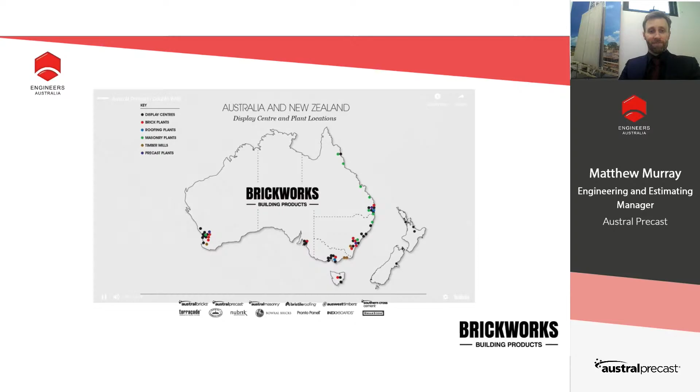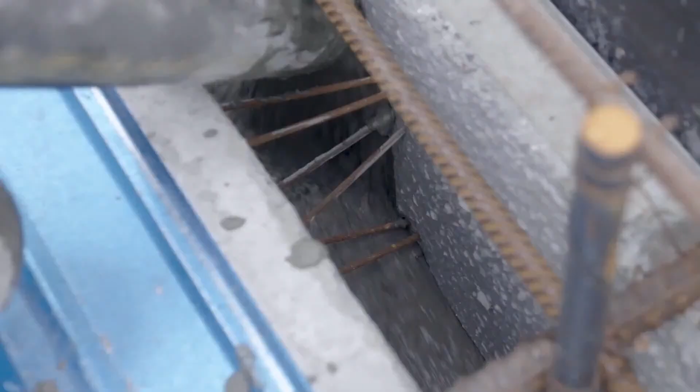Here's just a little snippet of double wall. Build with confidence with Austral Precast Double Wall, a permanent formwork system that brings quality, efficiency and flexibility to any construction project. Double wall uniquely combines the advantages of precast construction together with the engineering benefits of in situ construction. Fast and economical site processes, yet with flexibility for individual planning and architectural objectives. Double wall is the perfect solution for today's construction needs.

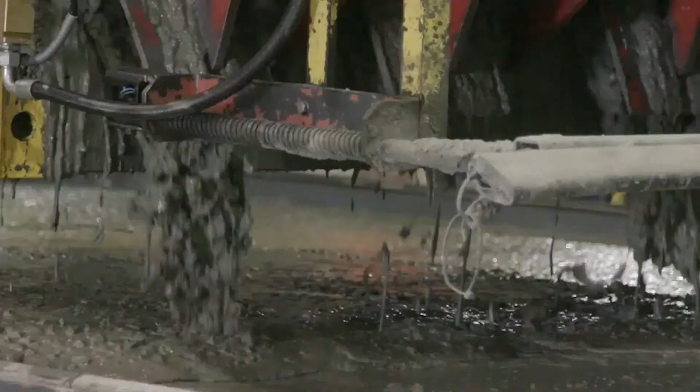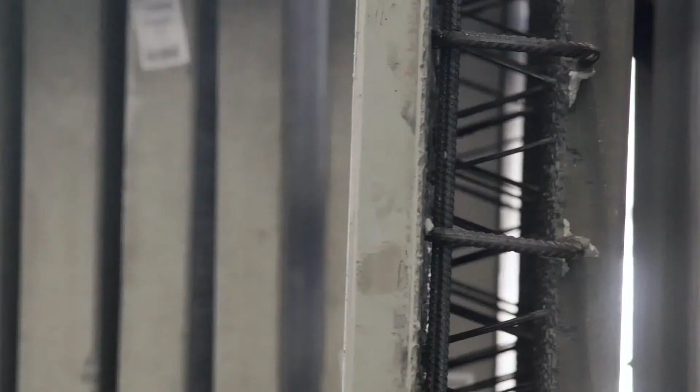Austral Precast Double Wall consists of a pair of precast reinforced concrete shells forming a cavity and connected by a lattice girder fabricated from reinforcement bar. Double wall is finished with joints and corners that minimize the need for on-site caulking, welding and formwork. Provisions for formwork with doorways and windows, electrical, cable, air conditioning and plumbing conduits are fully customizable. Overall wall thickness can vary between 170mm to 400mm, depending on each project's individual structure and applied load requirements.

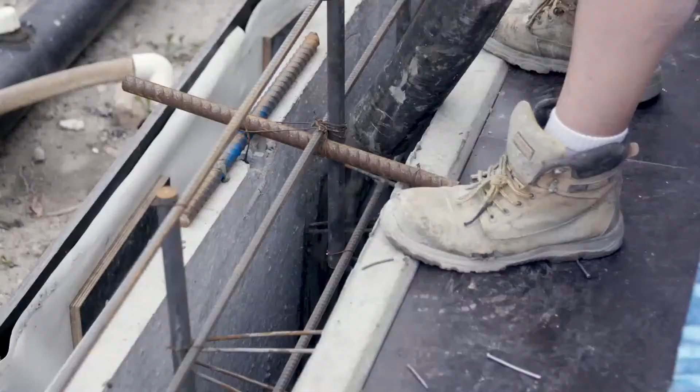On-site, double wall's hollow wall design structure allows for easier installation due to reduced weight crane loads. When cavities are filled with premixed concrete, double wall forms a strong and solid concrete structure. Unlike other permanent formwork systems, double wall has the added advantage of being installed with reinforcing for structural loads already incorporated into the product, eliminating 90% of the on-site steel fixing ordinarily required on-site. The results are ready-to-paint perfect facades where smooth surfaces are achieved on both inner and outer walls.

Austral Precast Double Wall is your ideal solution for stairs, lift shafts and basement walls, facades, cladding and retaining walls, functional partitions, noise, fire and sound barriers. And with the advantages of watertight construction and excellent thermal performance, build with confidence with Austral Precast Double Wall, the smart and efficient permanent formwork system.

Double wall is a permanent formwork system with all the quality and efficiency advantages of precast manufacture, together with the engineering benefits of in-situ construction.

So what is the major difference between double wall and a traditional in-situ structure? On the left-hand side here, we can see both plan and section views of a typical concrete wall with each face reinforcement shown in red and the starter bars in the slab in the darker colour.

On the right-hand side, we have a double wall. The major difference is that the double wall has a panel system, meaning there is discontinuity at the joint, and continuity of reinforcement is made by lapping steel at the joint in the core. Here the red bars represent the each-face reinforcement in each precast shell, with each precast shell connected by the lattice girder shown in green.

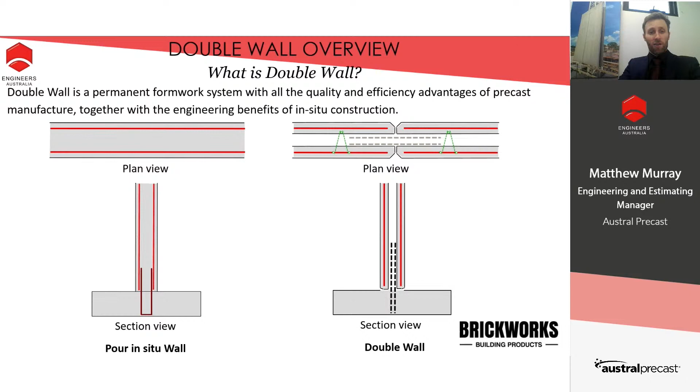The only structural difference from a double wall to an in-situ wall is that the starter bars and joint reinforcement have to be in the core of the panel to get continuity of the connections. On the left-hand side we see starter bars with essentially the same separation as the vertical bars, but in the double wall there will be a slight reduction in bar spacing due to the bars having to be in the cavity.

So double wall is a structural wall. The main thing for double wall is that the shell thickness is critical to the overall structure and the temporary works of the product. Shell thicknesses can be made from 55 to 70 millimeters, with 70 millimeters being the standard size of our formwork in our factory.

The core of double wall requires a minimum thickness of 70 millimeters, so that we can get the starter bars and any joint reinforcement into that core prior to concreting on site. The site concrete typically is a minimum of 40 MPa with 10 mil aggregate and 180 mil slump, using the 10 mil aggregate and higher slump so that we can make the concrete pumpable and get adequate core filling.

All the reinforcement that you would have in the in-situ wall is included in the precast shells of the double wall. The lattice girders connect the two shells together and serve two functions. The first is to connect the two shells together in the temporary state, so the embedment of the vertical bars of the lattice girder requires at least a minimum of 15 millimeters to connect the two shells. The second function is to make the wall act as a composite structure, and the reinforcement that crosses the interface from the lattice girder contributes significantly to this.

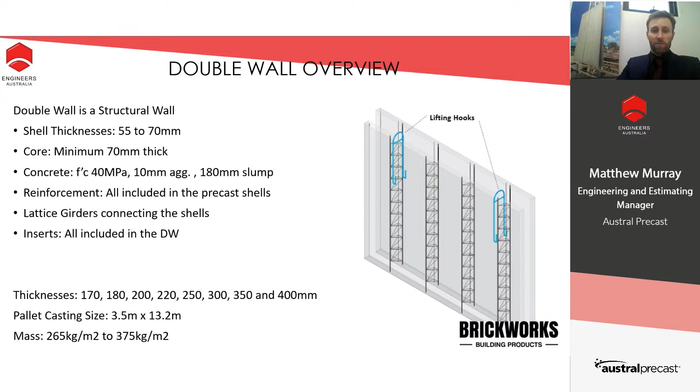So how do we actually manufacture double wall? The manufacturing is predominantly done in two stages of each concrete shell, with a flipping component in between. On day one, we make the first shell of the double wall, which has all the concrete, reinforcement, and girders in it. That is then cured overnight to reach a minimum of 20 MPa strength.

Once that has reached 20 MPa strength, the first shell is taken out of the curing chamber, put onto our pallet flipping mechanism, and inverted 180 degrees. Then the second shell is poured with the reinforcement in the second shell before the two shells are joined together.

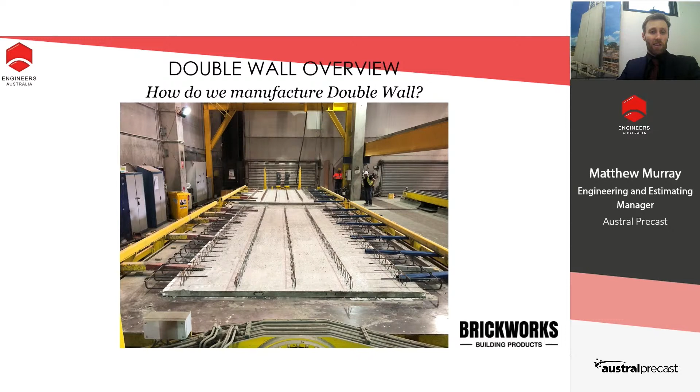For this particular product, we have some U-bar connections at the sides of the panel. The clamping you can see on the pallet, in red, yellow and blue, are essentially steel bars that clamp the pallet to the table. That's achieved through a hydraulic which cantilevers off the long yellow bars of the pallet flipping mechanism.

Once that's ready to flip, the pallet is raised above the station. The subsequent shell 2 is then poured, and that we can see here. Here we can see a 70 mm thick section that has all the concrete and reinforcement in shell 2 ready to go.

And then we flip this into the next pallet. Here we can see the flipping motion. This is a time lapse, slightly faster, but essentially what we're doing here is clamping the table above, inverting it 180 degrees, and then lowering it into the next pallet.

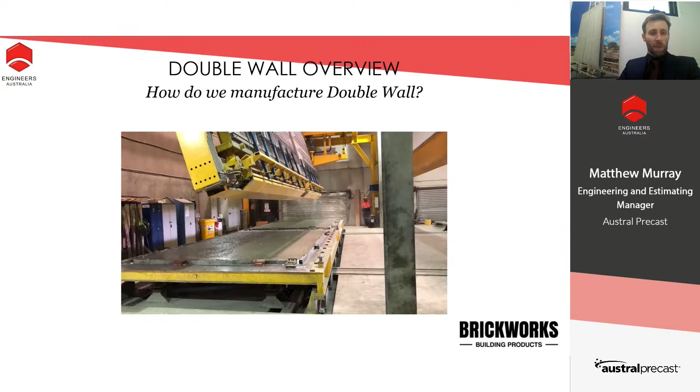Now there's a couple of key little things here. If we could pause the video - here we can see there's some tapered pins on the pallet. That's really critical in aligning the two pallets together, which we can see here on the left-hand side.

Essentially that does two operations - it separates the two pallets from one another and stops the pallet from crushing the panel below, and also centers that pallet to the pallet below. The panels themselves have some spacers in them, to help separate the two shells apart and to control the thickness. Once the pallet has been flipped, the pallet above is removed and the double wall is then put into the chamber, ready for its final curing stage before going to site.

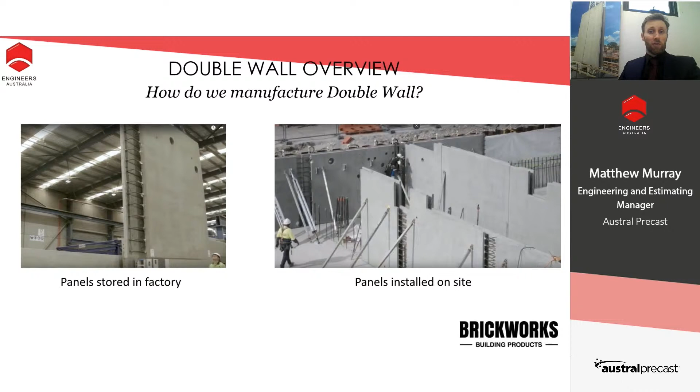So here we can see some of these panels that have been made in the factory. Typical construction manufacture methods has the double wall being made in the factory, lifted off the table using an overhead crane, and then put into storage. Once the site is ready for construction, the panels are delivered to site on an A-frame and stood and propped as you would with traditional precast using temporary bracing.

For construction on site, there's a couple of key processes. Firstly, the starter bar setout must be installed by the contractor prior to the delivery of the panels, as the starter bar in the base of the panel completes the connection of the vertical reinforcement from the slab to the panel. Austral Precast provides a starter bar layout in DWG format for surveyors and site installers, so that the layout can be done in accordance with the drawings.

Once the panel has been lifted, it's placed over the starter bars in the correct location and propped using temporary bracing, as you can see on the right-hand side. At this point, the joint reinforcement is placed inside the core of the cavity. In this case, the gentleman on the boom has a mesh made off our mesh machine being placed into the cavity.

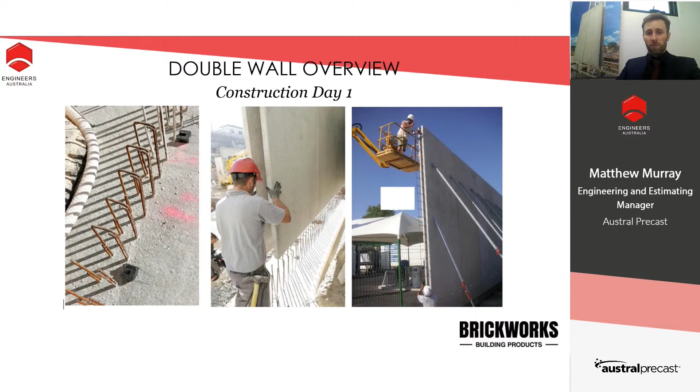The subsequent panels are then placed, and the next day the panels are ready for core filling. When it comes to core filling, we typically use a 10 mil aggregate, 180 or 200 mil slump concrete, and this can be done by either boom pump, kibble, or other methods.

The advantage of double wall is that you can also install the concrete on site either before or after your slab has been erected. You can pour double wall from the deck of your slab, or prior to the slab being installed, and any pour breaks can be set out with a construction mesh put into the core of the panel, so that in case the complete wall is not finished, you can have different stages of construction.

When it comes to the design of double wall, Austral Precast has a technical manual available online that is in line with current Australian standard regulations, AS 3600 2018, concrete structures. We have details available for compliance with all the new detailing design under section 14 of AS 3600, including provisions for boundary elements.

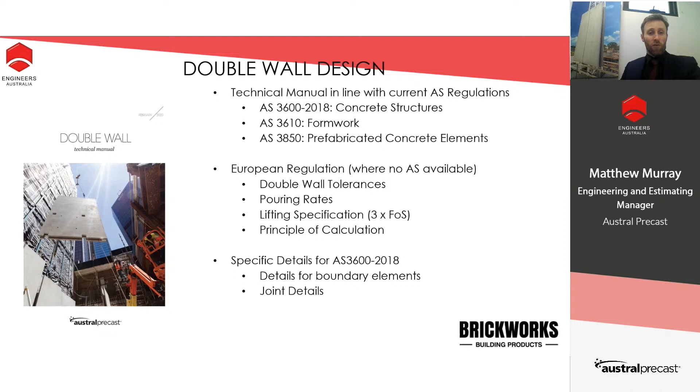Specific details are also available, as I said before, for boundary elements and also for joint details. As part of our technical manual, we also have the standard sizings available.

The key with double wall is the internal cover from the inside of the longitudinal bars of the girders and the core. It's the most critical part for the temporary state. Typically we need this C-min value, shown here on the picture on the left, to be at least a minimum of 15 millimeters. The size of the girder and the overall thickness of the panel will be dictated not by the overall size of the wall required, but by the cover and typically the horizontal bars, as the girders sit on the horizontal bars of the panel.

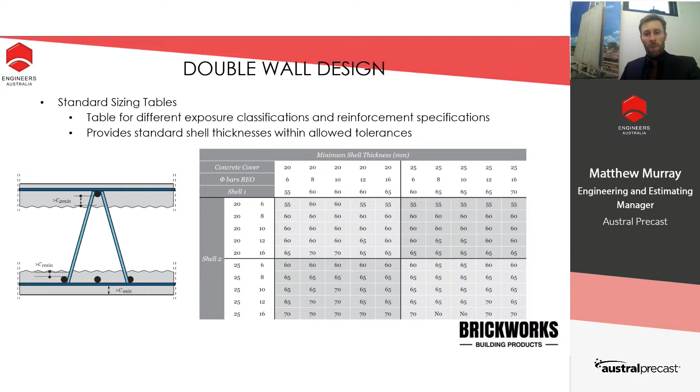We also have load capacity tables available based upon the minimum reinforcement requirements and the different thickness of walls.

A key component for double wall is that where there are no regulations available, we have gone to the European regulations, specifically the French regulation, which has been around for many years. Overseas, double wall is currently manufactured in excess of 6 million square meters alone in France, and they have been doing so since double wall began there in 1991. Today it is the predominant precast method.

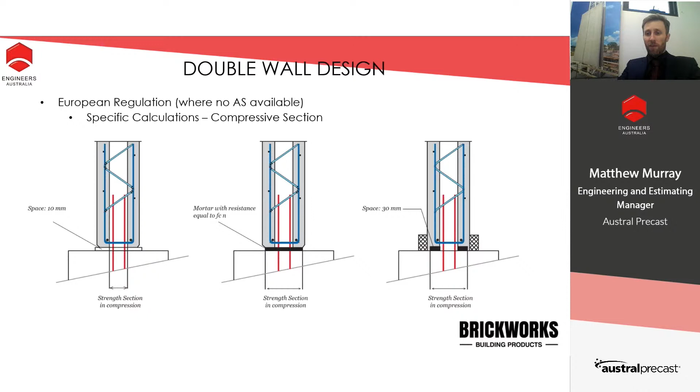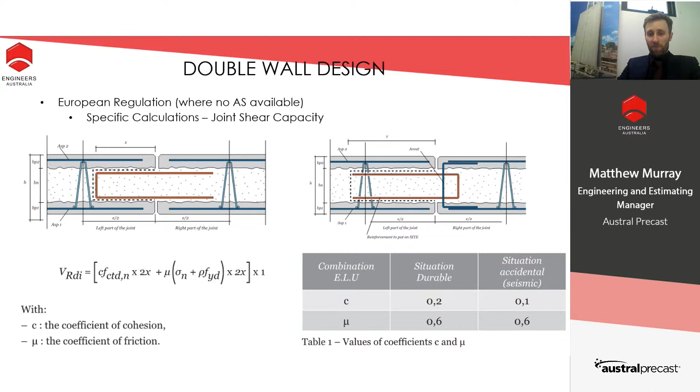Pouring rates: with every site, every contractor wants to fill the panels as fast as possible. The major thing that dictates this is the capacity of the girders to withstand the hydrostatic pressure of the concrete on site. Here we have the situation where we can see the girder spacing ranging from a minimum of 300mm up to 600mm.

300mm is the minimum spacing that we do for the girders for double walls as per the European regulations, and a maximum spacing of 600mm. When the shear capacity of the panel is not limited by the girder spacing, the next factor would then be the concreting of the core.

For instance, here we can see if we have a girder spacing of 400mm, we can core fill the double walls reliably at close to 1.4 to 1.5 meters per hour.

The main thing for this is that the girders require a minimum of 15 millimeters of cover, and we can increase these rates slightly if the cover is increased, but that will all come down to the size of the panel. From our perspective, it's more reliable just to rely purely on the minimum of 15 and the spacing, which is easier for design and construction, and also making sure the concreter and contractor on site are aware of the variation caused by temperature on the hydrostatic nature of concrete.

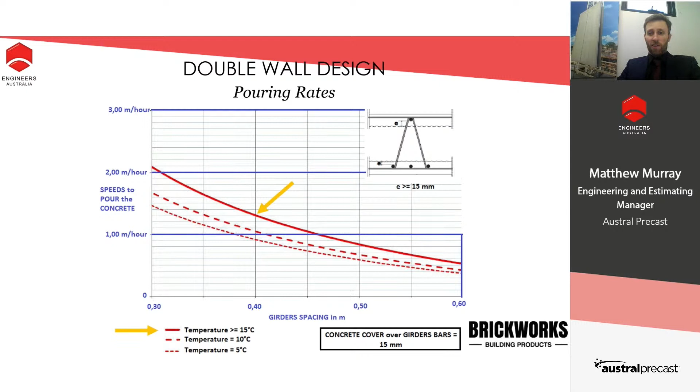Here we can see some different connections for double wall. These are purely hinged connections, which rely only on essentially the each-face reinforcement in the core, which is our most simple connection and for many applications is applicable.

If we want to have a more robust connection due to the structural requirements of the wall, say for instance a core wall or a retaining wall, then we can go to a fixed connection. What we do with the fixed connection is we provide a U-bar that is cast into the panel and then a stirrup that is placed on site to essentially tie the two shells together. This section requires one edge of the shell to be shorter than the other to expose the U-bar, which leaves an opening on site for placement of the stirrup, which is then completed with formwork on site.

For a retaining wall or a water retaining structure, we can also have a protruding U-bar at the base of the panel, whereby the slab is poured in conjunction with the first section of the base of the wall, and this helps with the continuity of the concrete and a more durable construction when it comes to waterproofing for water retaining structures.

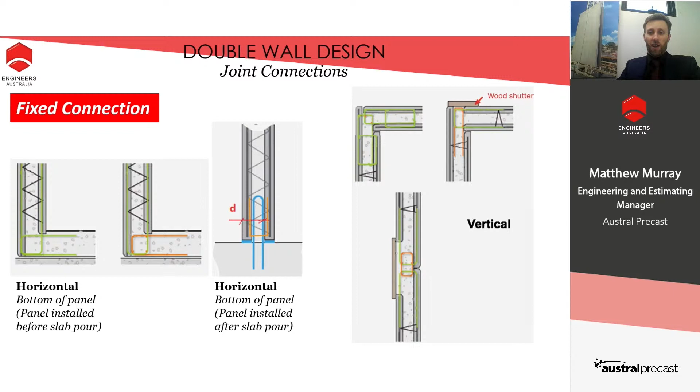Joint treatment for double wall can be treated typically the same as you would traditional precast. Above ground, we use a backing rod for the panel joint to stop any slurry coming out of the panel during core filling, and that can be completed either before or after core filling. A caulking can then be applied for a traditional precast finish.

On the left-hand side here, we have an example where the wall is in contact with the ground, for instance a basement wall. In this case, we use a bituminous impregnated foam cord that is stuck to the first panel before the second panel is placed. The main advantage is that the bituminous foam cord has better sealing against contaminants or water entering the joint, and it's more durable. From a construction perspective, this also means we don't require access behind the wall during construction.

So we land the first panel, apply the bituminous impregnated foam cord to the joint, which essentially sticks onto the edge of the panel, and then install the subsequent panel.

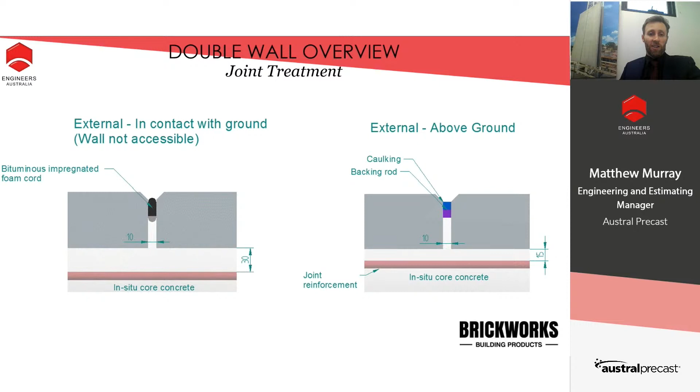Here are some projects we've done with double wall in Australia. Austral Precast's first job was for Wynyard Walk Station in Sydney, with large 400mm thick walls with heavy reinforcement up against a boundary wall. This was a very good project and the first one for getting off the ground at Austral.

In the last 2 years, we have completed another 22 projects since launching double wall to the market with a more structured approach and more intent on the design and specification. Here we can see one of our first data centers we did with double wall for AW Edwards, for the Equinix SY5 data center in Mascot, Sydney.

For this project, we used double wall for the retaining tank walls, shown on the left-hand side. These walls are actually the water retaining tank for the cooling liquid for the data center. We also used double wall for the shear walls internally in the building. Every shear wall connecting to a large precast column was double wall with a wet joint to connect the two together, which completely eliminated the use of any cast-in plates on site and any hot works for the double wall and column interfaces.

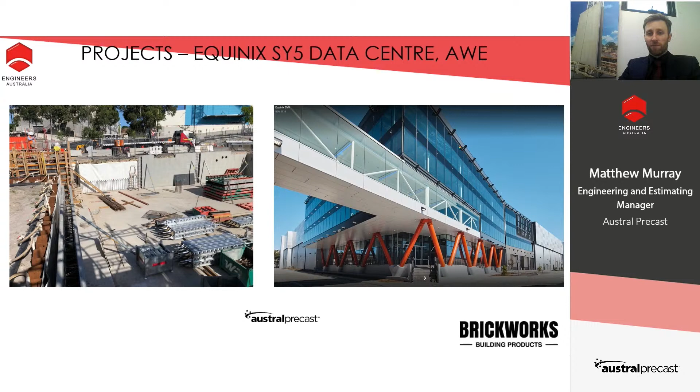Another successful project recently is the Greenslopes Private Hospital, completed in 2020 for John Holland in conjunction with Bligh Tanner. Here we can see double height spin-up panels for a very large lift core and stair core for Greenslopes Private Hospital.

When it came to installing these panels, we provided John Holland with a starter bar layout to ensure all these starter bars were correct. Once that was confirmed on site, which the guys from John Holland did a very good job of, the panels were installed typically in 10 to 15 minutes per panel.

If you compare this with traditional precast, where we might have, say, a dozen starter bars that might be N28s or N32s, 1.5 meter length protruding into the panel, this was a much easier construction process, and the overall result was very good for John Holland.

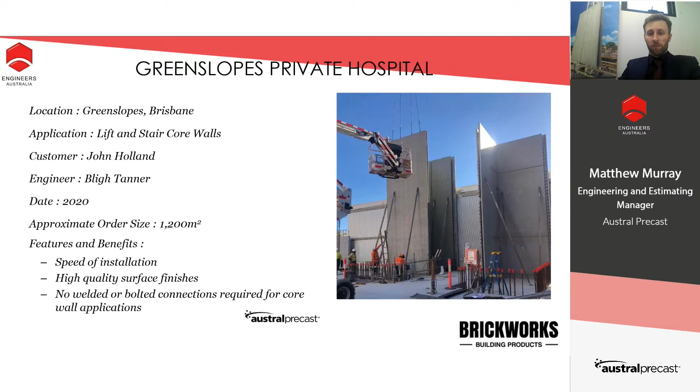Here are some of the specific details we used for the hospital. Essentially we have the starter bars with a 30mm packer for the bottom of panel connection. On the right-hand side, near the door opening, we would have a cage in one panel and a U-bar in the adjacent panel, whereby a hairpin was inserted into the panel on the left-hand side before being pulled over on site and the vertical bars placed.

On the right-hand side here, we can see the connection for using stirrups with 2 U-bars to complete the fixed connection. One advantage of double wall is that we utilized a modular formwork system.

We came up with a modular formwork system for manufacturing and installation of the panels. Here, for the connection openings we saw prior, we have the formwork shown in green with a bracing plate shown in red.

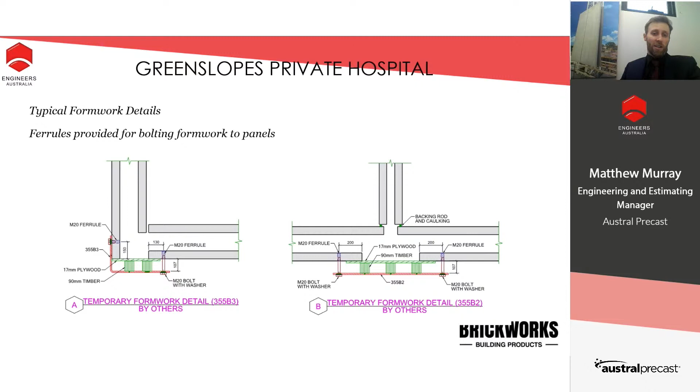Essentially the panels come with ferrules installed. The contractor can place a piece of formwork, the same size for each level, and put a plate we provided over the formwork section and bolt it up. This significantly reduced the formwork on site, helps reduce stripping and construction time, and results in a very good structure for the builder, and also an inspection point from the engineer's perspective.

Some other jobs we've had underway recently are the WestConnex M4, M5 link tunnels, for the project team there. We were working with engineers from Jacobs, with approximately 2,000 square meters of double wall. What you can see here is what we call a panel rotation device.

This device on the left-hand side rotates the panels: the crane picks up the panel off the truck and places it into this stationary device. They then move the crane hooks from the top of the panel to the side, and rotate on site. The reason for using this is because there was limited access for use of an A-frame on site.

With the stillages that Austral provided for installation of panels on site, the panels could be delivered without the use of an A-frame, just lifted off the truck and left on site, then installed at the leisure of the builder. With a project like WestConnex, which runs 24 hours a day, this eases any contractual issues between precaster and contractor, as it takes away demurrage costs for transportation and enables the guys on site to plan their day more effectively.

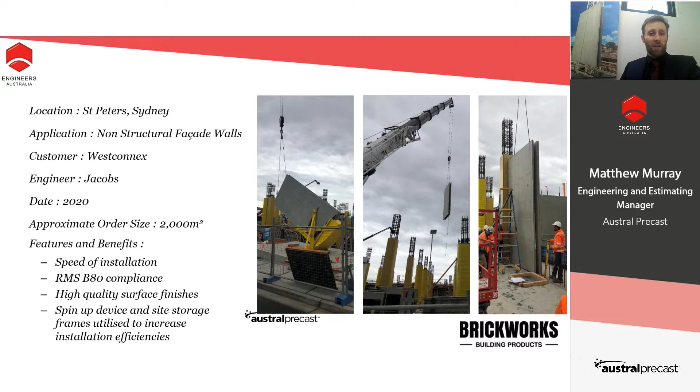Some other projects here: the M5 WestConnex. This is an exhaust tunnel building at Arncliffe. One key thing with this structure is that it uses double wall as a deep beam wall for 2 sides of the structure, and also has integrated buttress columns.

Here we have 12-meter high walls with the outer shell protruding 1.5 meters above the panel, which allowed the installation of some large precast beams to tie into the panels.

From a construction and design perspective, the key thing is that the fixed connection with integrated buttress column allowed a modular formwork system to be used with the panels.

The advantage of this is that it significantly increased the speed of construction for the contractor. A comparable building as an in-situ structure took over 12 months to build, whereas this in double wall was approximately 3 months, which is a massive win for the subcontractor.

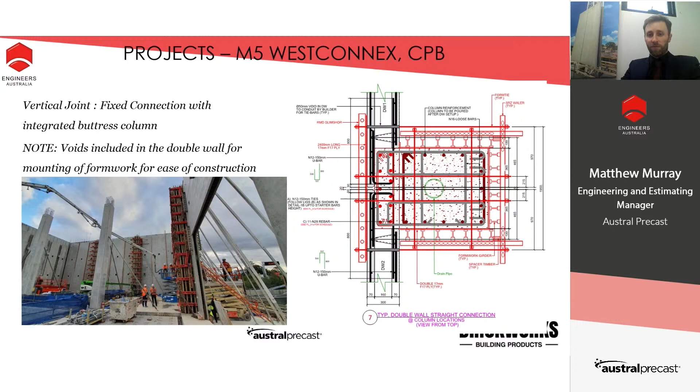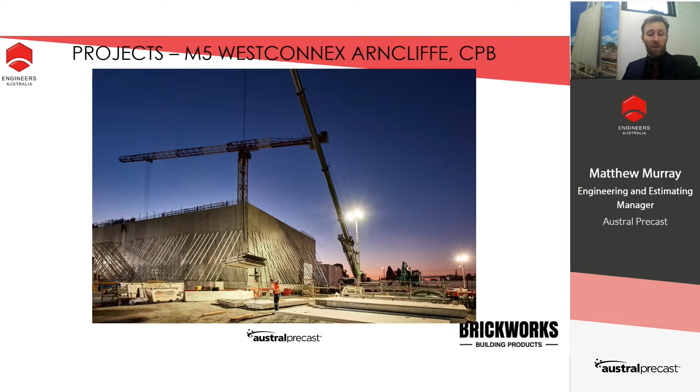Here's the finished result for the WestConnex building. If anyone ever comes out of the tunnel near the M5 near Sydney airport, please have a look at it, because it is quite impressive. This building now actually has another building on top of it, housing all of the mechanical fans and whatnot for the tunnel.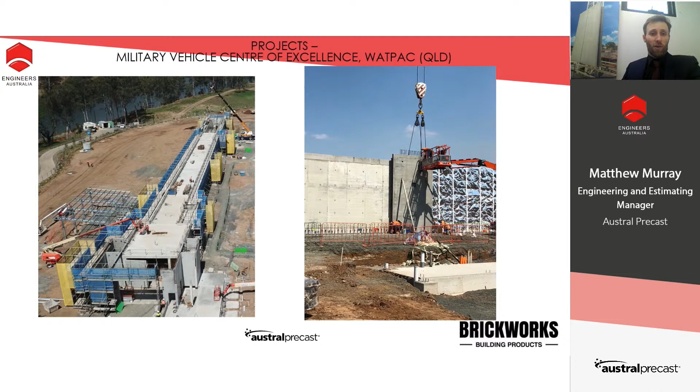Another impressive project completed in 2019 is the Military Vehicle Centre of Excellence for Watpac. We have double wall for the office and control station towers at each end of a tunnel, with a double wall and hollow core structure around the existing tunnel. This is because a military vehicle's cannon must be fired on site prior to delivery to the Australian Defence Forces. Double wall allowed us to reduce panel spacing to the rear of the existing tunnel while achieving both acoustic and structural requirements, plus speed of construction.

Here we have some double wall panels for the Holiday Inn Express for ADCO near Sydney Airport. One major advantage is that panels can be installed essentially 50 millimeters away from the adjoining boundary of the existing building. Double wall panels here are being used as the external shear wall for the entire structure.

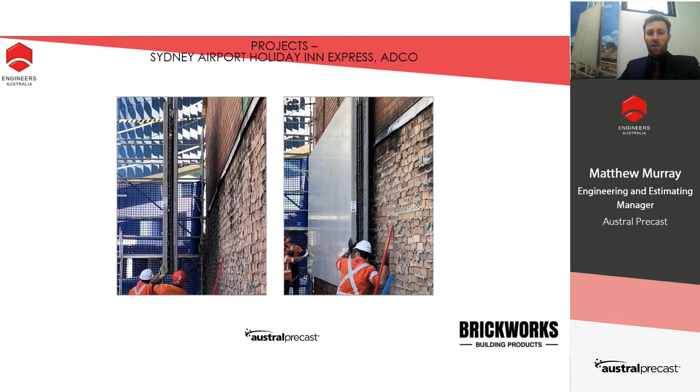When building with double wall, placing panels on the boundary line is a very significant advantage compared to other methods. Because we can core fill the panels and apply waterproofing at the joint, the spacing required to the boundary can be significantly reduced, increasing speed and reducing construction time for the contractor. The water tightness we can achieve is up to 20 meters of waterhead, just for interest.

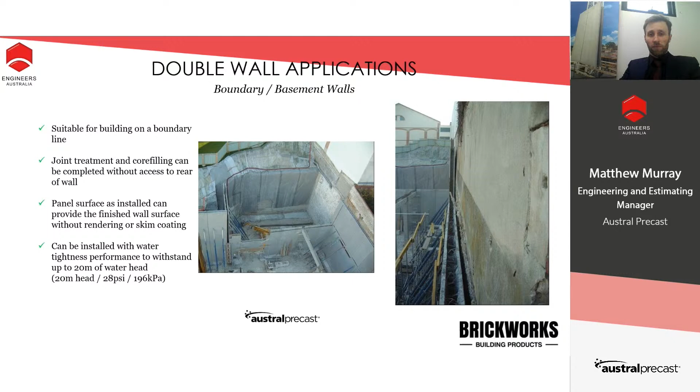Here we have some retaining walls. We can do cantilevered retaining walls with double wall, which requires essentially a similar footing to in-situ construction. The main check would be by the engineer on bending moment, particularly shear, especially at the joint from the bottom of the panel to the footing.

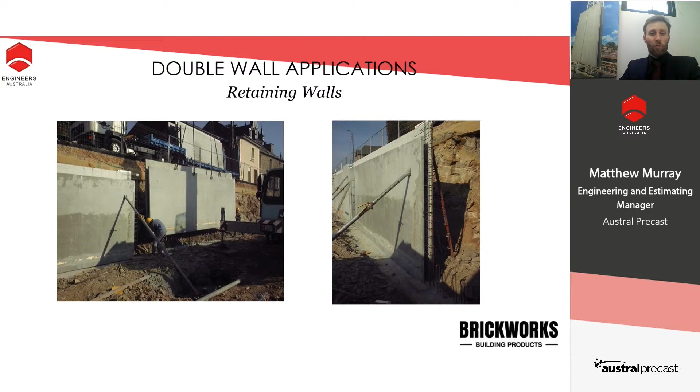The other thing you can see here is a significantly reduced requirement for earthworks at the rear of the panel compared to in-situ methods.

Double wall overall is a permanent formwork system with the quality and efficiency advantage of precast, together with the engineering benefits of in-situ construction. It's a high quality Class 2 off-form finish with all the reinforcement already in the panel. When constructing the panels, the structural design should be converted directly from an in-situ design, utilising a mu factor of 2 under the Australian Code. Once that design is complete, we put reinforcement into the panels as per the engineer's drawings, which reduces the design process. We also have reduced trades and hot works on site, and overall the speed and efficiency of building with double wall is the major advantage of this system over traditional precast and in-situ methods.

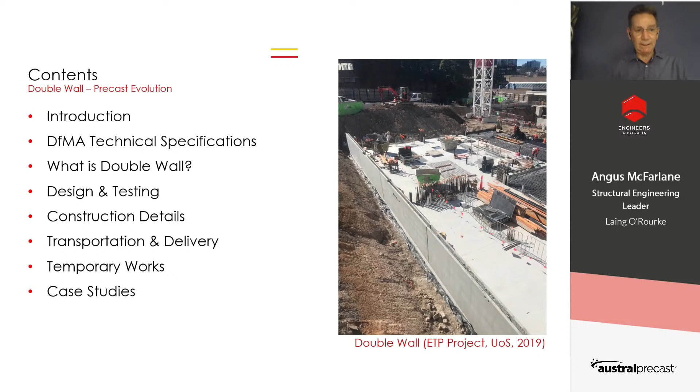The subjects for the double wall presentation are shown here. I won't bother reading them all out to you, but the important ones are DFMA technical specifications, what is double wall, and the case studies.

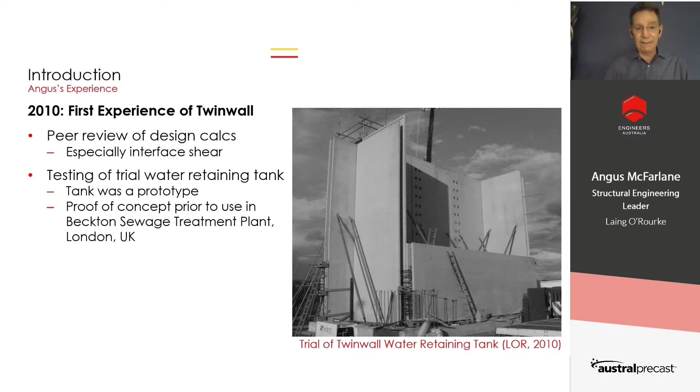In my introduction to double wall, it was actually Laing O'Rourke's version of it, which we have in the UK, called twin wall. This twin wall was going to be used on Beckton treatment works, the sewage treatment works in London in the UK. So I was called in to do the peer review of the design calcs and carry out the water testing of the prototype tank. You can see the photograph of the prototype tank there.

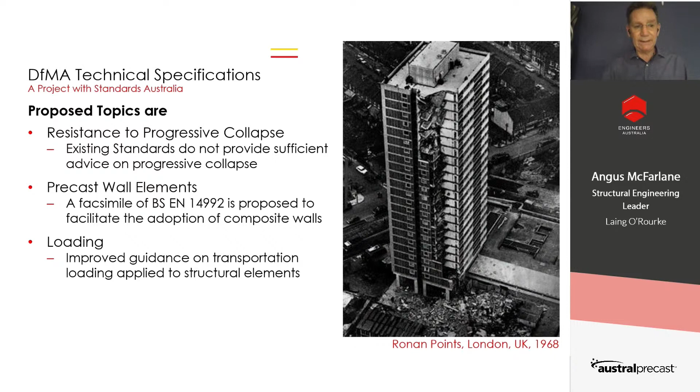Now, I mentioned at the start the DFMA technical specifications. This is a project that we're doing with Standards Australia. What they want to do is try and unlock or facilitate the use of off-site construction. So we're currently looking at 3 standards or specifications, and there could be more depending on the progress of the project. The 3 we're looking at are progressive collapse, precast wall elements, and loading. I'll discuss these in the following slides.

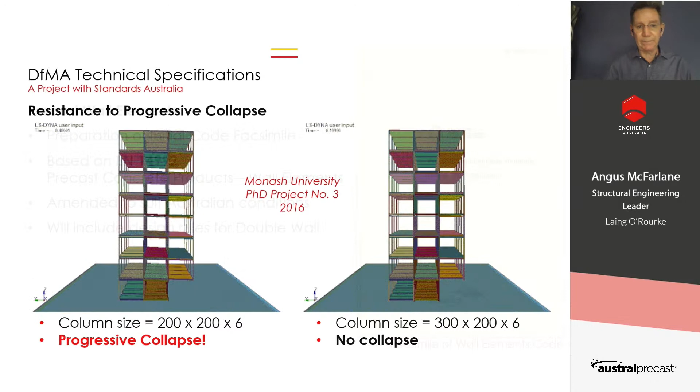Now, the technical specifications - one that I'm doing at present is a mock-up of a Eurocode, EN 14992. This is not unusual for Australian standards to use Eurocodes. There's a crane standard, 1418.11 I think it is, which uses a facsimile of a Eurocode. So I'm doing this to let the members see that we could get to a standard quite quickly. So the aim is to either do a technical specification or a standard adopted from the Eurocode.

Thirdly, what I'm looking at is loading. AS 3850.2 gives some guidance on loading, but it doesn't really give enough, especially shipping loading and rail transport. Also, with modular construction, I know that Hickory Construction and Hickory Building Systems in Melbourne did a hotel in Port Hedland in WA, and that travelled nearly 6,000 kilometres by road - I think it's 5,400 kilometres by road - and I think the fatigue loading would be horrendous on those modules, especially since most of the roads in the outback are dirt track roads.

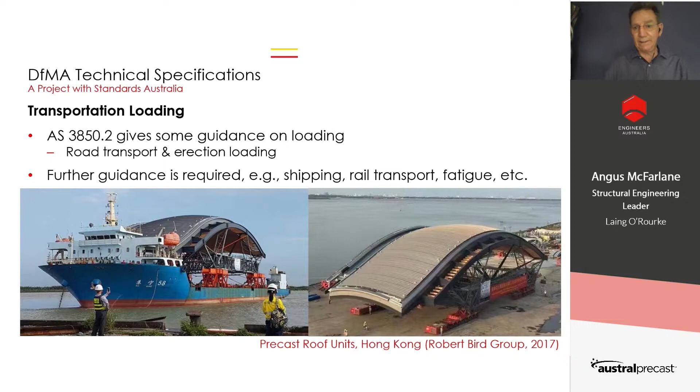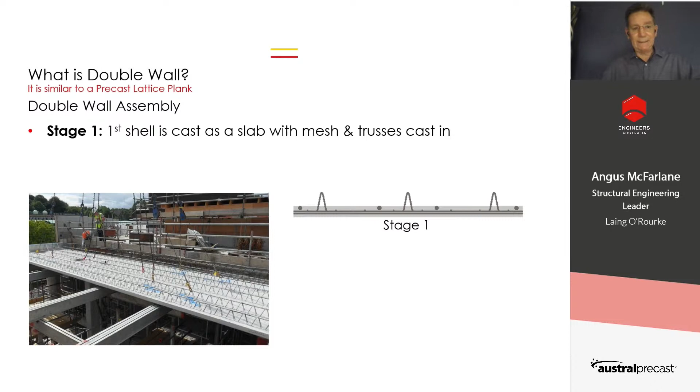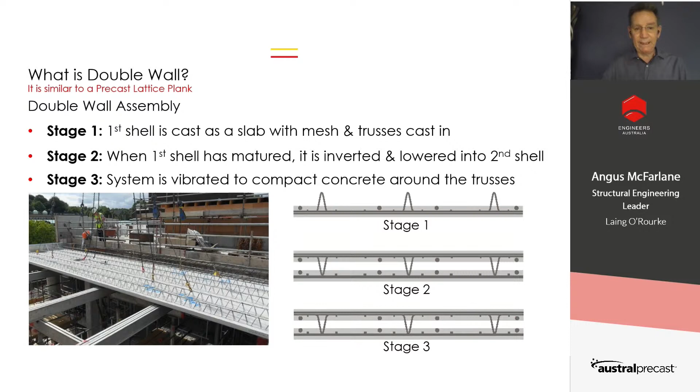Now here's how a double wall works. First of all, you cast the slab with the lattice in it, and that's similar to the lattice girder you can see in the photograph on the left-hand side. You then cast a bottom shell and mate it with the top shell, which is already matured concrete. Then vibrate the whole lot so that everything, all the concrete, is compacted around the trusses.

Now I show a short video here of our precast facility in the UK. I've turned the music off deliberately because I don't think it's come over very well over the internet. But you see the high-speed carousel, which brings the concrete to the batching dispenser or the concrete batching plant itself. These are all robotically controlled.

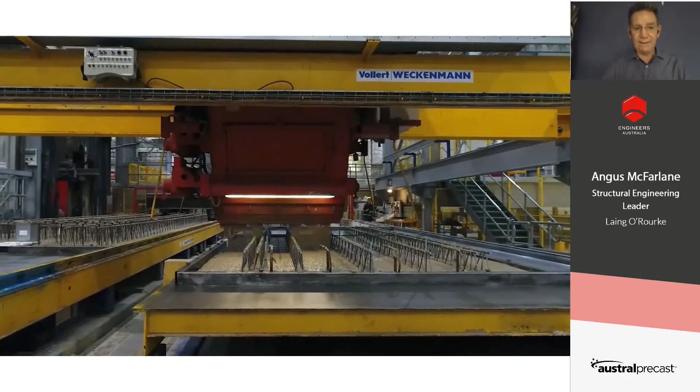Now there we're pouring the initial shell of the double wall. This could be any precast component - it could be a slab component as well. The reason I know it's double wall is because you tend to have a double row of lattice girders at the edge of the double wall.

As I say, there's not a lot of labour involved in this. Most of the labour runs the robotic control systems. There is some labour, but we try to do as much of it by robots as possible. Then to speed up the strength gain of the concrete, we've got curing chambers, which are obviously heated up in the UK.

Now you can see the double wall components. Well, it was twin wall in our case, but it's the same product. Twin wall is just the Laing O'Rourke name for double wall.

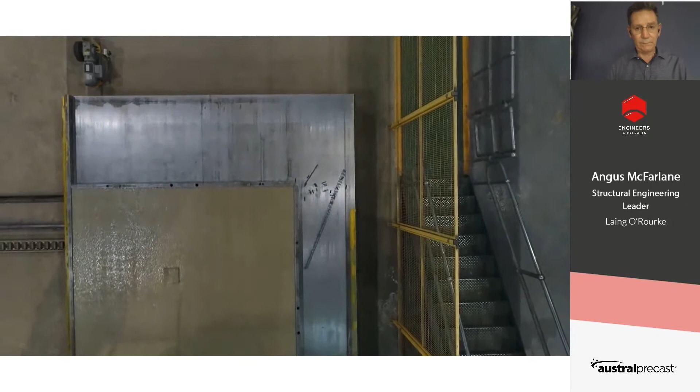Then this is the mating process of the two shells being brought together.

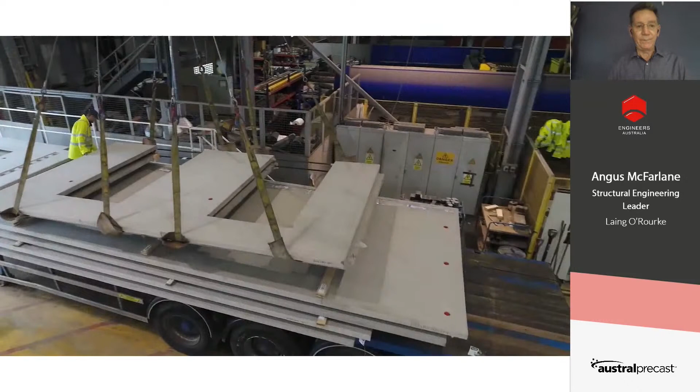Now you can see the mature shell on the left hand side. Unfortunately, the video I've got didn't show it getting flipped over onto the other shell, which is a bit of a pity, because that's very interesting. But you can see there's a completed product there.

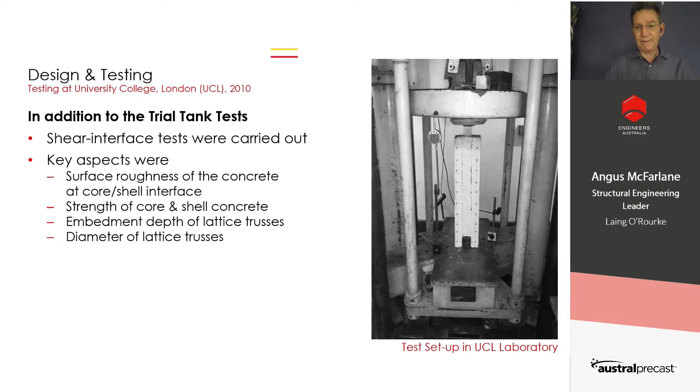Now, design and testing, as I mentioned earlier with the Beckton treatment works trial wall, there's a lot of testing done at University College London, UCL. Mainly the testing was a shear interface test to check that we could actually get composite action. The key aspects of those tests are the roughness of the concrete, the strength of the core and the strength of the shell concrete, the embedment depth of the lattice trusses, and the diameter of the lattice trusses. So those were all the variables that were used.

Now, the reason for this testing and why it's applicable to Australia is the Australian Concrete Code, AS 3600, uses the Eurocode 2 equations - it's the 2018 version. You can see that there in table 8.4.3. Now, AS 3600 doesn't explain the roughness very well, so I've put in what the roughness from the Eurocode is - 3 millimeters. I think the explanation would probably come out in a commentary to the code, which I haven't seen yet.

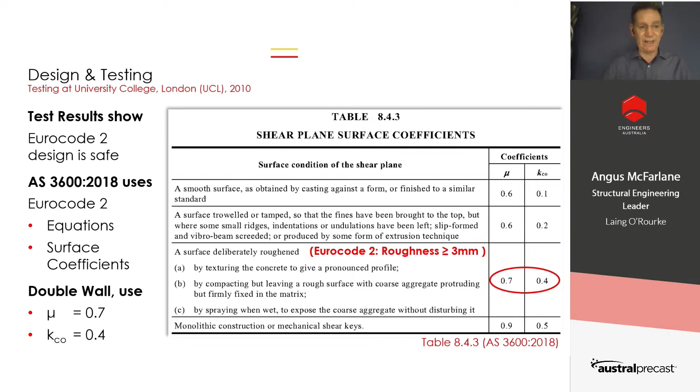But for double wall, we use these parameters, which are very good. Those are the second highest parameters you can get. If you look down the bottom here where my cursor is, the highest parameters are for monolithic construction, which is 0.9 and 0.5, versus 0.7 and 0.4 for double wall. So we get very nearly completely composite construction.

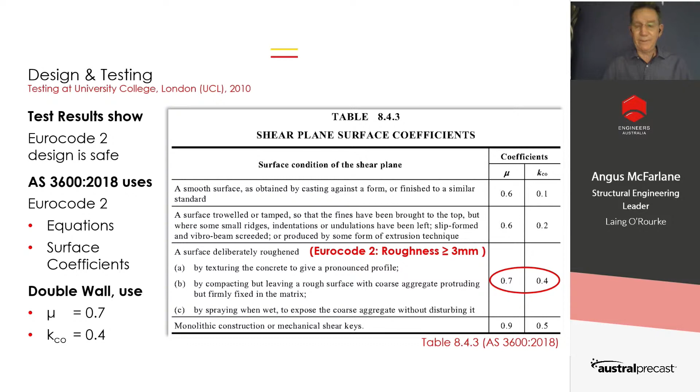Corner joints, again, virtually identical to corner joints in situ construction. Here you have 2 layers of reo, which is a standard reinforcing detail. And in this one, we've only got 1 L bar in the joint. Occasionally, if you're doing very high pour rates with very high walls, you may want to put in some corner plates and structural steel to stop the joint from failing.

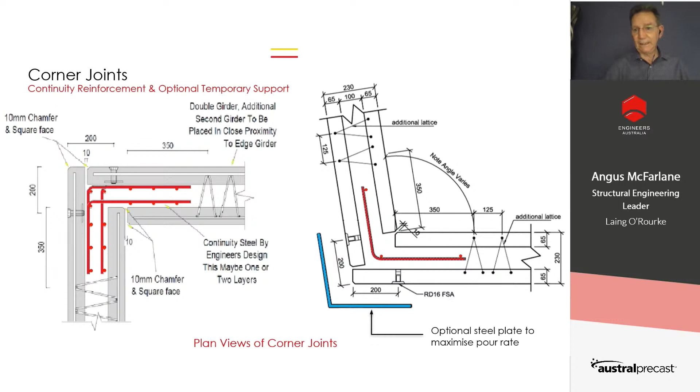Again, a T-joint, again, it's similar to in situ construction. You just drop in your reinforcement cage in the joint there. This would probably be typically a full height cage, because it's probably there to resist opening or various other structural forces.

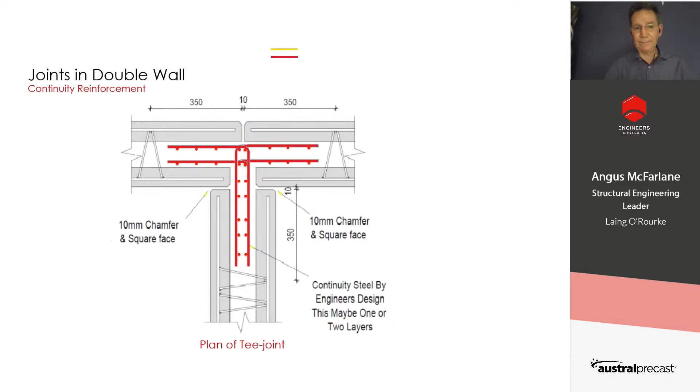Wall to slab joints, it's best to stick to floor height if you can. It makes construction easier and you can get your connections easier. So you avoid double height walls unless there's no slab connection at mid height. The continuity reinforcement will be placed after you've got your working deck down for your slab.

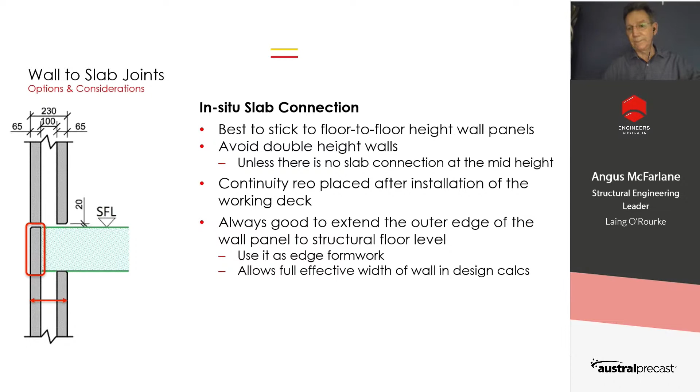And it's always good to extend the outer edge of the wall so that it works as a permanent formwork for the slab. It makes the on-site work easier and allows the full effective width of the wall. However, one of the things I prefer, which I'll show you in a minute, you've got lattice plank or preformed slab systems such as hollow core or Bondek.

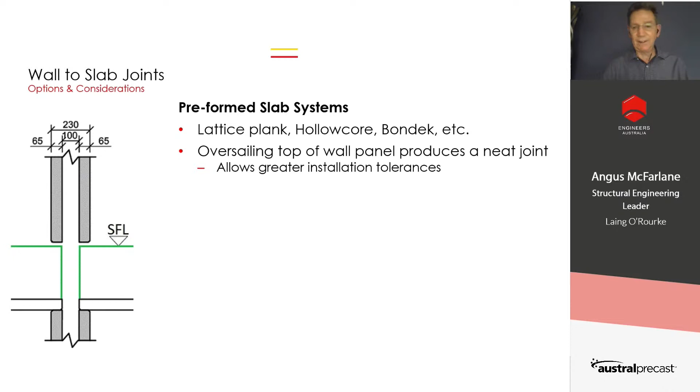You oversail the top of it. That means you can get greater installation tolerances and make the concrete the same strength as the core concrete, the same strength as the slab concrete. Consider that in the design calcs. But as you saw in the testing earlier, the core concrete doesn't influence the overall strength of the wall by much.

A personal choice for me is you put neoprene strips in there. That prevents grout leakage, but the trade-off for that is you've got reduced wall section there. But that's not usually a problem because that's usually just pure crushing, whereas the wall will be designed for buckling elsewhere, so you'll probably find that reduced section there is the same strength as the full section elsewhere.

Now, transportation and delivery, just some key points here. I'm saying the panel height is 3.5 meter max. That's usually for transportation - that might very well be the width of the panel. You might want to go longer if you're doing double height, but that'll get worked out for you by the double wall people.

So the maximum trailer can carry is about 3 panels, 3.4 meters by 6 meters. You can do other things if you get special permission for transportation. But as a rough guide, that's about 20 tons weight.

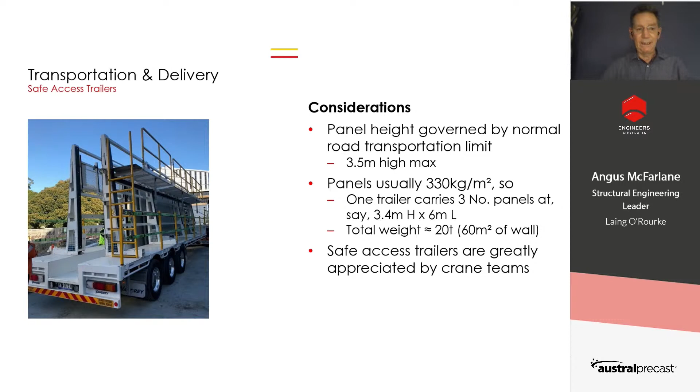Now, these safe access trailers are really appreciated by the crane teams and the dogmen. It allows them to get easy access and very safe access. There we go, just lifting the thing in.

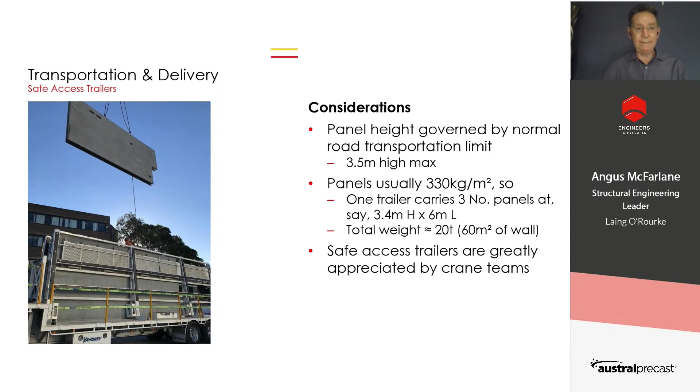Now, temporary works - I'm not going into too much great detail, but it's best to sequence the wall after the slab's done. Fixing to temporary blocks or in trenches or whatever is not usually as good. Sometimes you need to do that depending on the construction program, but if possible, you should try and sequence the work so you do it from the permanent slab.

And finally, just for health and safety, collision protection of the bases - you'll need to put barriers in here if plants are moving around, or something else to restrict plant from collisions with the double wall until the concrete core has cured.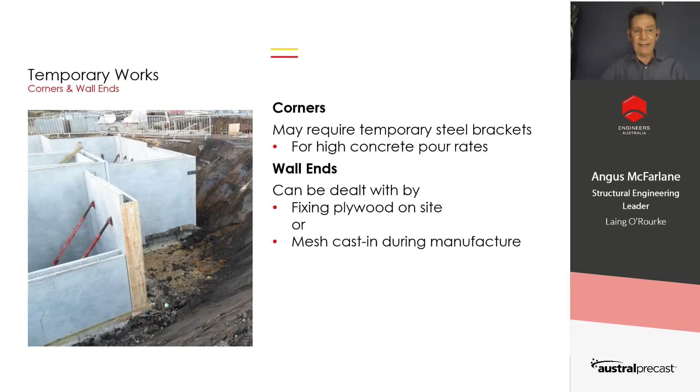Now, corners may require temporary steel brackets, as I mentioned to you earlier. Or wall ends, you can fix ply onto the end if you want. Or quite often what we do if it's inaccessible, instead of the ply, you can put mesh in there. That is cast in the factory, and that acts as a stop end shutter.

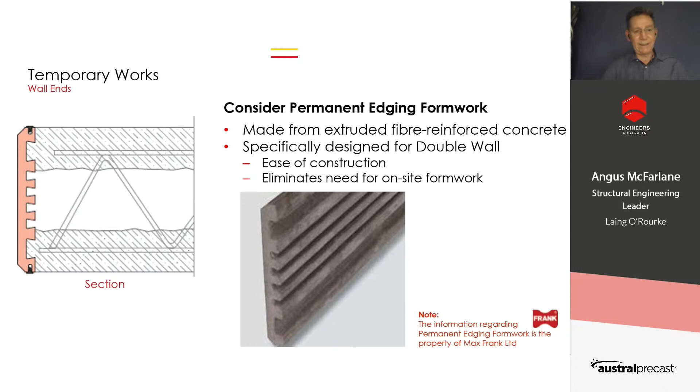Or an alternative, and this is an alternative from the double wall website, is you can use this permanent edge formwork - proprietary permanent edge formwork, which is specifically made for the double wall and eliminates the need for on-site formwork or mesh.

Now we'll go on to some case studies. The first one's from the UK. It's before I joined Laing O'Rourke, I was still with Hyder, but this is one of my colleagues, and he worked on the Durham University Library. It was a fully precast solution, because at Laing O'Rourke we believe in DFMA and off-site construction as much as possible. We try to get about 70% of our work off-site if we can.

Now this is a solution here, fully precast, and there are 119 twin wall panels. Now you can see that the panels there in blue, then the different panels - 1 story in grey, 1 story in blue. Those are the twin wall panels.

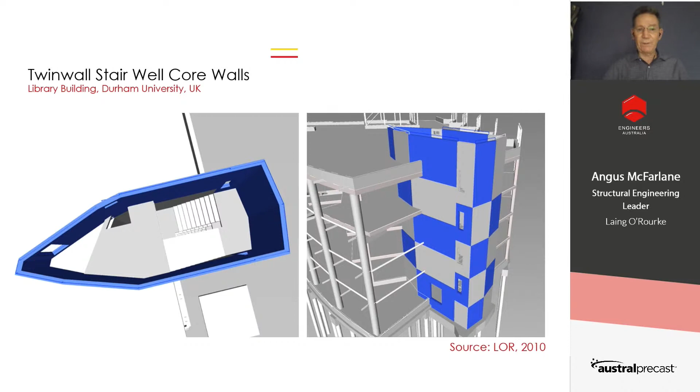Now what's interesting about this job is you're not restricted to rectangular shapes. It's normally best if you can go rectangular, but you're not required to. You can see this shape here, and even this back wall isn't rectangular - it's got a small dog leg in it.

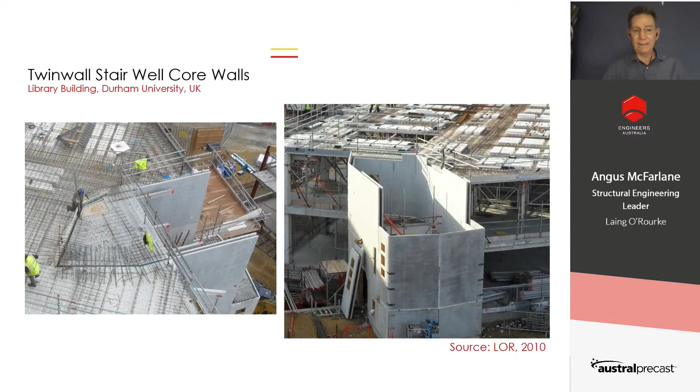The stair adjacent to the existing building is an excellent application of twin wall. It avoids a lot of temporary formwork. Now this is doing what I'm saying you shouldn't do, double height, but there are no half height panels. So to get over the double height, we had to put in an extra row of props, and to pour the concrete, use the scissor lift to get access into it. The stop ends were done with mesh, so you didn't have to go back and fix formwork at height.

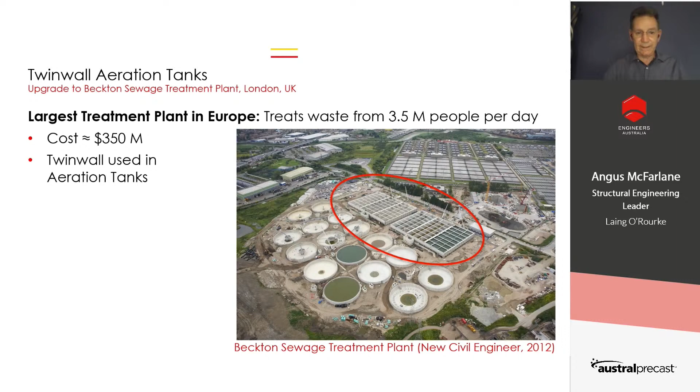Now this is the Beckton treatment works, the sewage treatment works I mentioned at the beginning. This is when I first got involved with twin wall. It's the largest sewage treatment plant in Europe, treats 3.5 million people per day, just a little bit less than Sydney. At that time it cost $350 million. The twin wall was used in the aeration tanks, which are shown here.

There are the aeration tanks, and that's the trial tank off the aeration tank. One thing I didn't mention, we did these long walls here, two types of wall, one horizontal twin wall and one with vertical twin wall. This column here is just measuring, it's got a deflection gauge on it to measure the deflection of the wall when this tank is filled with water. It's basically to prove the tanks were waterproof.

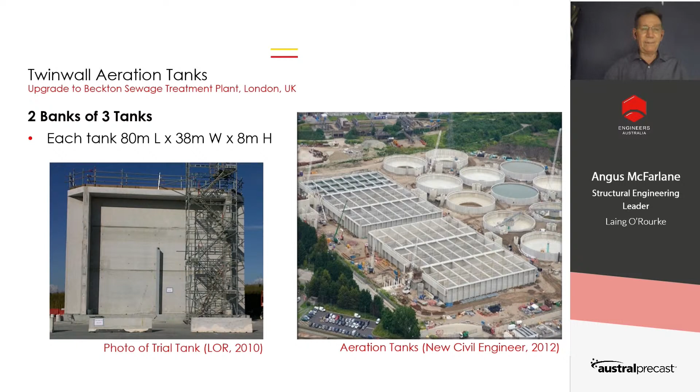It's done to the Institution of Civil Engineers specification. It's filled with water, no internal waterproofing. I think if less than 10 millimeters of water leaks out in 2 weeks, then it's deemed waterproof. It might be 2 weeks, it might be 3 weeks, but I'd need to check up the specs. But the test was a resounding success.

So the original design was by Arup. The original design would have been by Hyder, and Laing O'Rourke wanted my team, Hyder Dubai, to do it, but I wasn't allowed to do design in the UK by Hyder UK, and so the Hyder UK people didn't get to grips with it as well as we had. So Arup got the job and made a very good job of it.

Now here's the alternative, the twin wall or double wall design. One drawback I didn't mention, currently with double wall and twin wall, is the maximum thickness you can get is 400. Quite often on taller buildings I would like it to be 600. So to get the moment of resistance, we needed to use buttress walls. I'll show you some buttress walls later on, not in this project.

The overall solution saved 50% reinforcement, not a huge saving in concrete, only 10%. There was a large saving in the program, which was the biggest saving, but I don't have the figures for that unfortunately. It was a significant program saving as well. So overall, it was a resounding success.

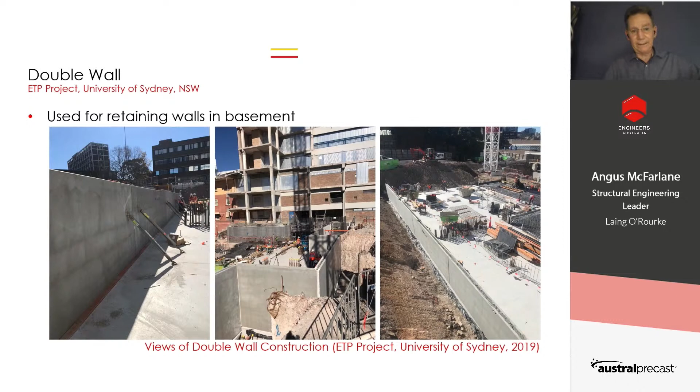But our engineer was reticent to use it as structural core walls or shear walls, which is one of the reasons why we're talking to Standards Australia to get this design in so you can use it as a fully composite wall. We want all stakeholders in—not just some engineers who believe it's fantastic and you can use it fully compositely. Other designers are a bit reticent, and our designer on this project is a bit reticent. So the technical specification or new technical standards will hopefully get over that, and we want some of the more reticent engineers to be part of that approval process so they become stakeholders, and we can answer their queries during the project's progress.

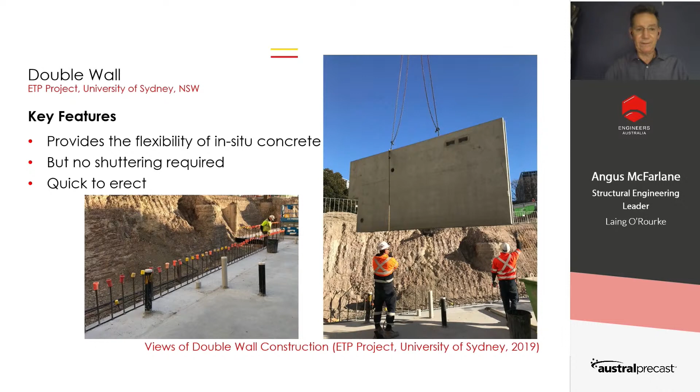Now the key features of the double walls you'll see here, there's the starters. These are the single row starters here. It provides the flexibility of in situ concrete, no shuttering required, and it's quick to erect. So you just drop them on, prop them, then fill them with concrete.

So we had a look at double wall. We also looked at a shell wall, which is like double wall, but you put one shell up, fix in your reinforcement, put another shell up, then pour the whole lot together on site. It's a bit more time consuming than double wall. And we looked at solid PC.

Our value engineering exercise showed that double wall was the best.

The costs were initially about 50% higher, but we revamped the buttresses and got it down to about 20% higher. And when we go through another round of value engineering, we should get them very similar to the in-situ.

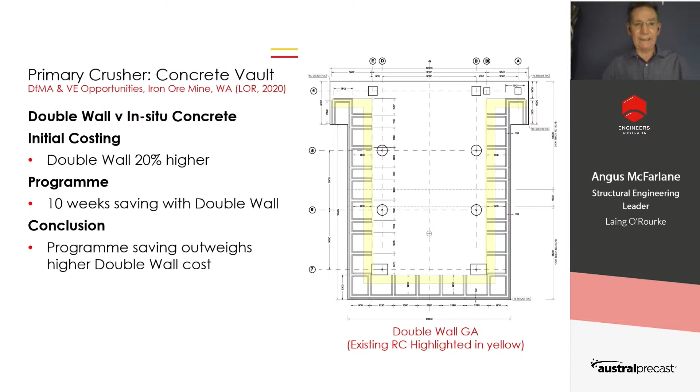Now I've almost finished. It didn't take too long at all. I'll just do a quick summary of some of the things I've mentioned. The installation program - this is what we find, and no doubt Matthew in his other presentation can give you information for Australia.

In the UK, we allow for 30 minutes per panel, but you can usually half that. You can usually do a panel every 15 minutes.

I recommend using self-compacting concrete or something very similar to it, and normally 10 millimeters aggregate. That makes sure your concrete core is completely compacted with no voids in it.

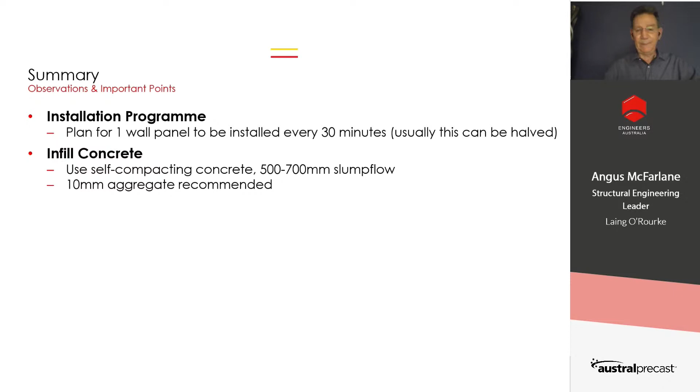Keep the wall panels simple as much as possible. You can cast in items, especially with digital engineering and your BIM models, but it needs more coordination. You're far better keeping it simple on site - it means less design coordination and more reliable results, basically less mistakes.

And with visible joints, if you're exposing the joints, try and keep them simple in one plane or the other plane. Don't try and expose them in both.

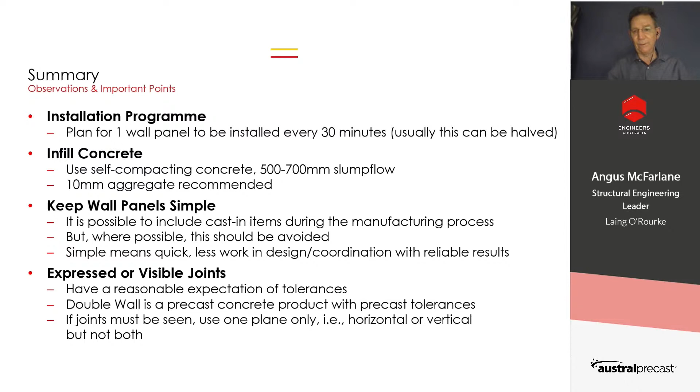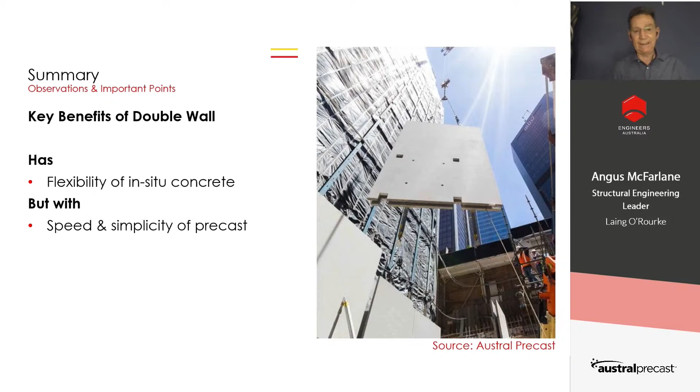Now that's the presentation pretty well finished. To sum it up, the benefits of double wall is it has the flexibility of in-situ concrete, but it comes with the speed and simplicity of precast. Thank you very much.